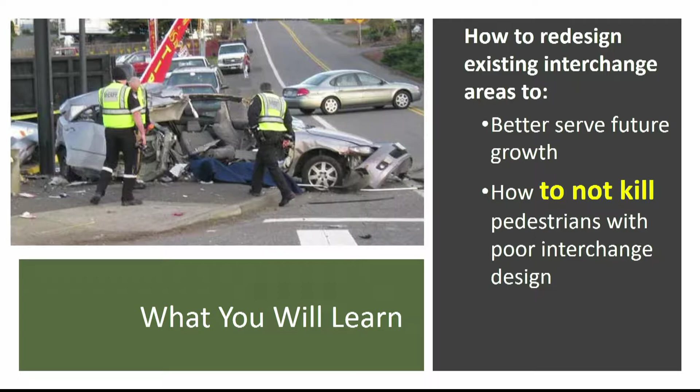As I said before, interchange areas have an extremely important function. They are the gateways to our community. The interchange decision, whether you build one or not, is one of the few times in your careers where you can take land that's $10,000 an acre and turn it into $3 million an acre based on your decision. So you better protect those areas.

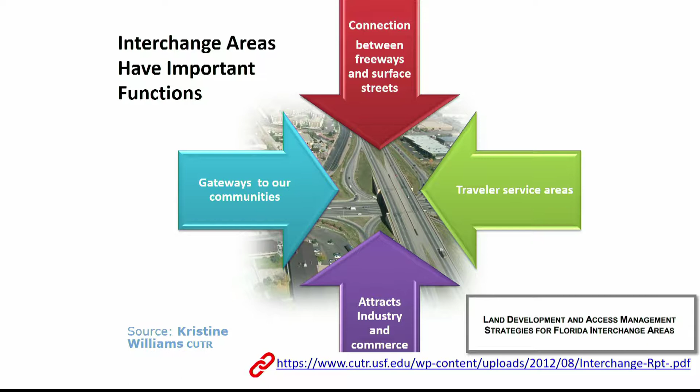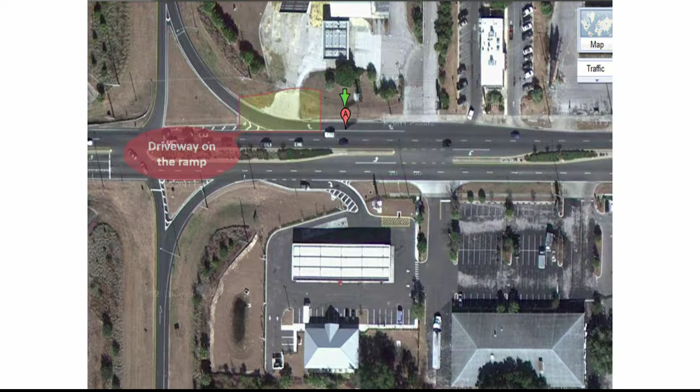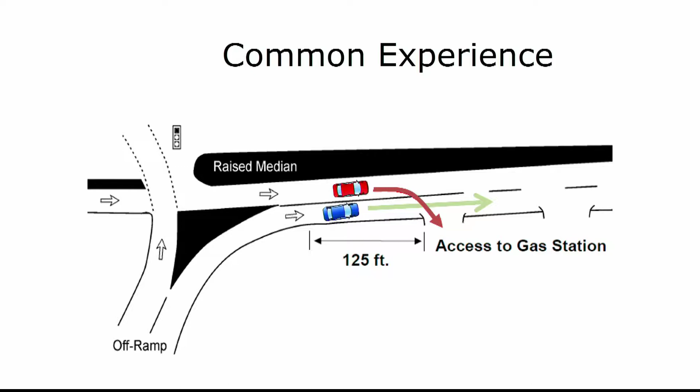Unfortunately, bad examples are really easy to find everywhere, including Florida. Obviously, the red portion is the off-ramp, and just look, this is extremely common. I'm assuming that Florida is not the worst place in the United States. We've got ramps, we've got driveways on ramps. That's what it looks like. And again, not only is it an important area to protect because of the importance of the land use around interchanges, but the confusion of the unfamiliar driver is even more pronounced in interchange areas.

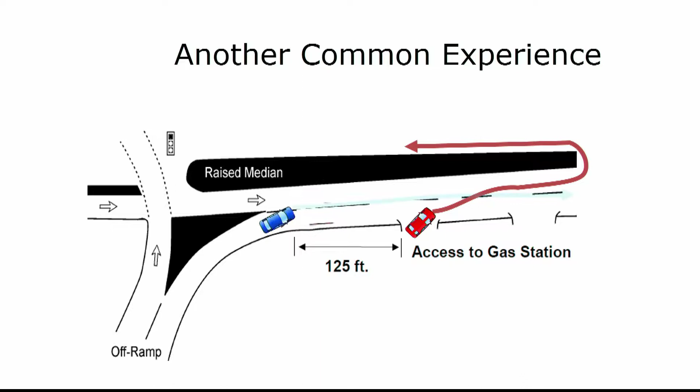I am sure that these situations of very tight weaving by unfamiliar drivers and familiar drivers is familiar to you.

One thing that Terry said that I didn't restate, I would rather you ask questions of me as we go along, just because I really do think that's better for our communication with each other. And the other is I'm much more interested in your questions than I am getting through with these slides. I don't really have that many. I will stay on time, but I really love to hear from you. And so interrupt me, go, hey, you know, because I'm looking here.

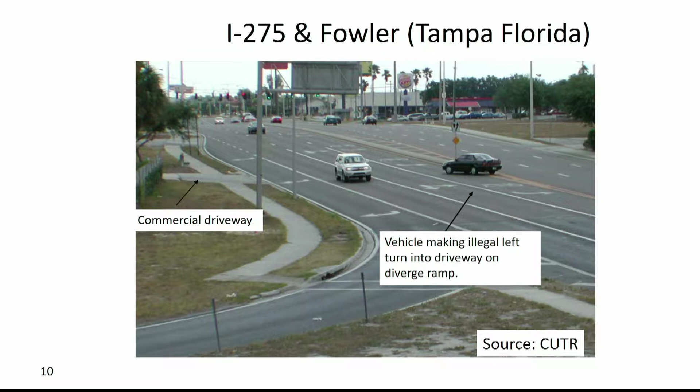But anyway, Kristine, in one of the courses that she's done for me, as I said, it is really easy to see bad things happening at interchanges. And that is one of the reasons, because there are a lot of unfamiliar drivers out there. In addition to that, they are not very bicycle and pedestrian friendly. A lot of times they were never designed for that, but as the land use develops around these virgin interchanges, the entire nature of that area changes.

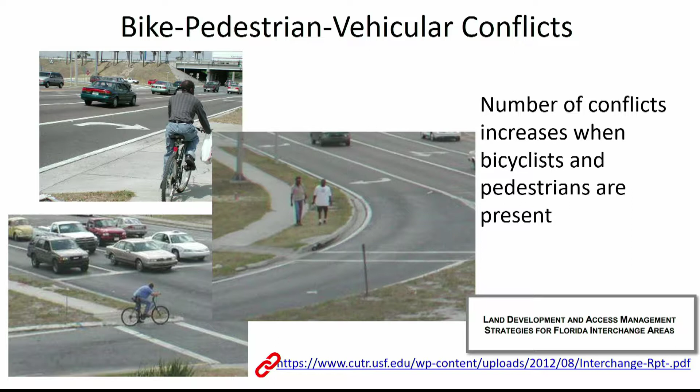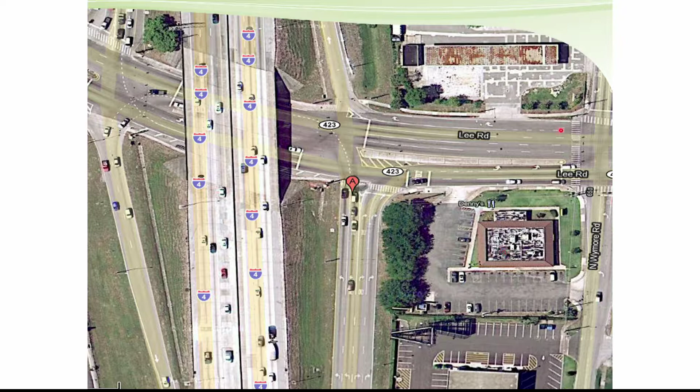To give you a different view of it, there's Interstate 4. Here's the off-ramp. Here's the business, or at least at the time, Denny's, and Wymore Road. Now, in Florida, our access management standards are fairly tough. Driveway spacing is 440 feet in most areas, and directional median openings are quarter mile. Yes? Where does your 440 come from? The 440 actually is a percentage of a mile. It did not come from scientific analysis. When we created our standards, we just used portions.

Well, we knew that signal spacing, half-mile spacing, was supposed to be ideal. And if you come to my presentation on complete streets, you'll find out maybe it's not ideal. But at the time, we thought it was ideal. And land development splitting was done on the mile basis, and then we just kept splitting it down to, mostly, the subdivision of land. And we did have one scientific number, and that was 230 feet for the minimum spacing. And that was based on the ability to stop and maneuver at a certain speed. But the rest of it was pretty off the shelf.

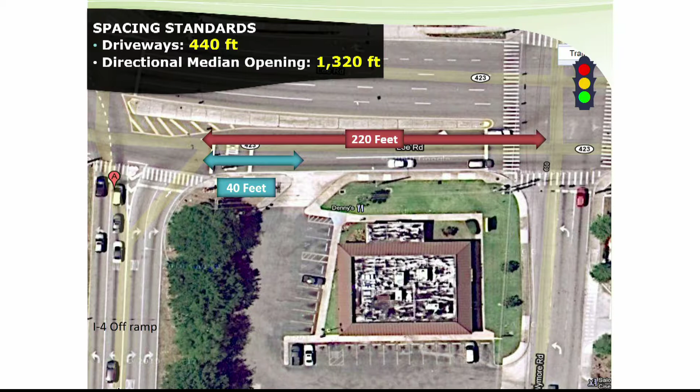back in the 1960s when they designed this and they saw Wymore Road was 220 feet from their off-ramp, they should have made a decision right then and there. You know, what are we going to do with Wymore Road? Or maybe we should have this interchange someplace else.

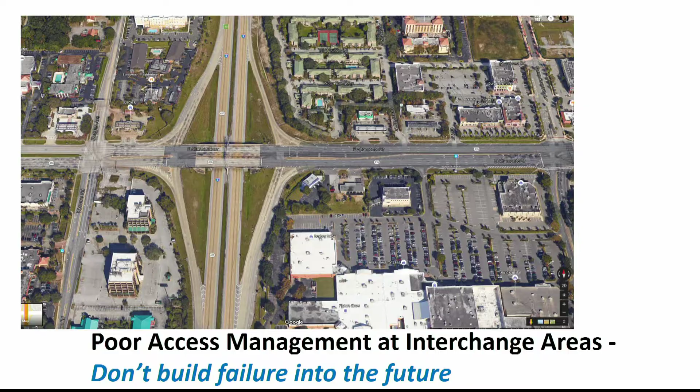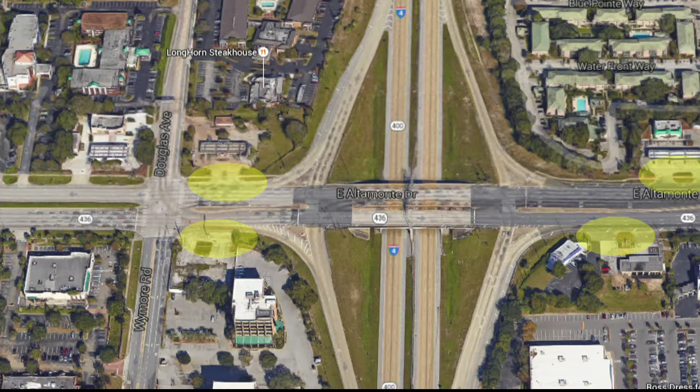A couple interchanges north of Lee Road on Interstate 4 is the most busy interchange in the state of Florida. It's Interstate 4 and State Road 436 in the city of Altamonte Springs. Let me go a little closer here on it. As I said, the busiest interchange in the state. Notice where the driveways are on here. Notice where the traffic signal is. That's another one that's about 300 feet.

Maybe they didn't know it was going to have that much traffic in the 1960s, but they should have had a clue on that. Yeah, State Road 436, when I was a young kid, was called the truck route. How many people have had an experience with that? Oh, we're going to build a truck route so people don't have to go downtown. We're going to take all that traffic off the main road. We're going to put it on the truck route.

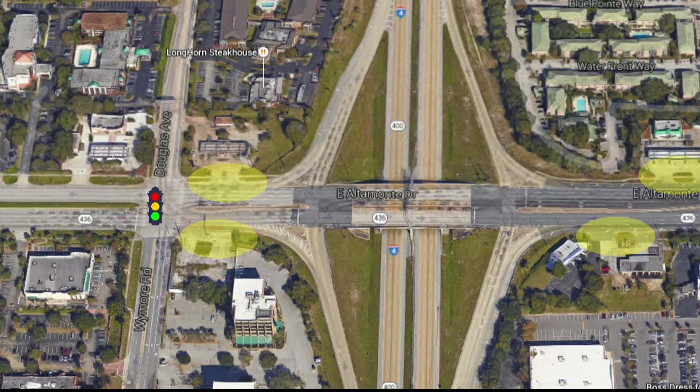Well, anybody who knows anything about State Road 436 now, trucks are 5% of it. What 436 did was open up a heck of a lot of land to develop, and it did. And that's one of the reasons there's so much traffic on it. So,

we do understand at Florida DOT that Interstate 4 through Orlando has outlived its design many, many years ago. So they have something called the ultimate plan, which means I think that they're never going to do anything more. I'm not sure. But this is what the current plan looks like. It's under construction now. This is a little bit more of a plan view. I'm going to show you something I thought was fairly interesting.

Now, they purchased the access rights to this quadrant a long time ago. But for some reason, this time around, they could not afford the access rights to this little gas station. So they're going to continue, even into the ultimate, to have this driveway here. That's okay. The most important thing they did was take that traffic signal and Wymore Road. Remember Wymore Road? It was all the way back at Lee Road, too.

Wymore is a north-south road that runs pretty parallel to I-4 through the Orlando area, or the Winter Park, Altamonte Springs area. They decided they cannot have that signal anymore. Great. So what they did is they didn't close Wymore Road, they just stopped the crossing movement. So that took some good designing to do that.

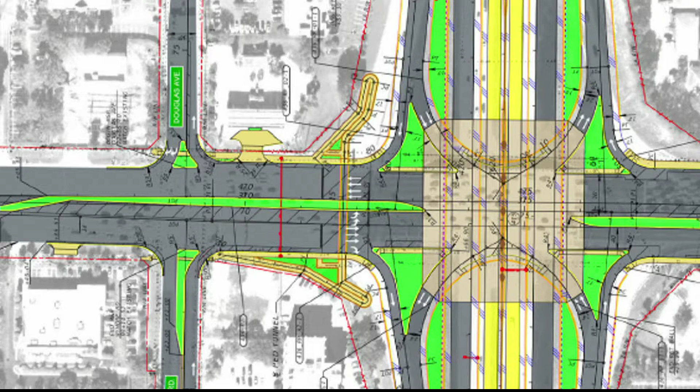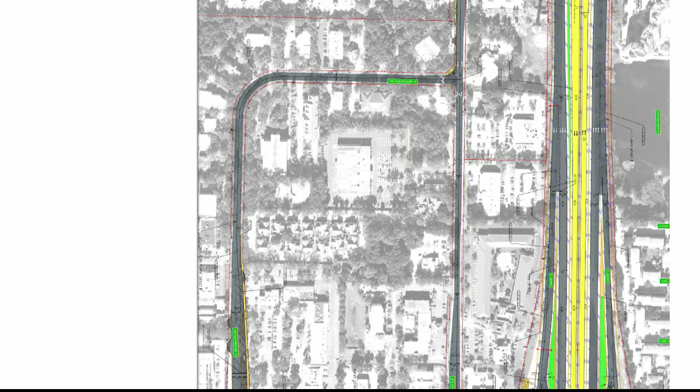Let me also point out that since they did cut Wymore Road off from being through, they, now that I'm retired, I don't say we, built or connected through a number of collector streets to provide that same interconnectivity that existed before, you'll notice. And

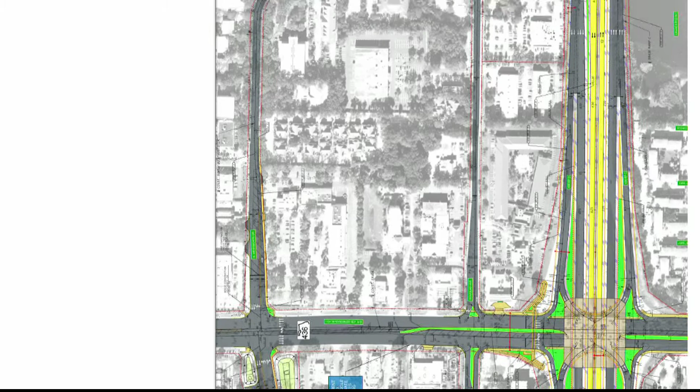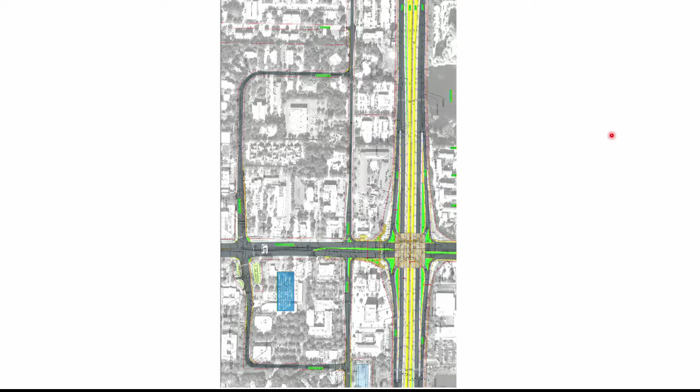what you don't see is that the city of Altamonte Springs, which is, in my opinion, one of the best suburban cities in the state, with their own money built bridges across I-4, knowing that our interstates, though providing great accessibility for people on them, have split up our communities, made it harder for them to be connected, and they built with their own funding bridges across.

Now, one way to make sure when you build interchanges that you protect that area around it is to have what's known as a limited access right-of-way line. This is where you either purchase or you've traded with property owners to have a significant, let's say, over 1,000 feet, even though Federal Highway has a 300 or 400 feet minimum. You got to go way past the minimum.

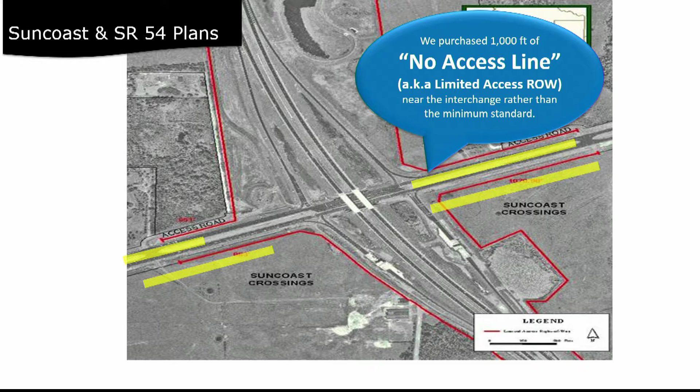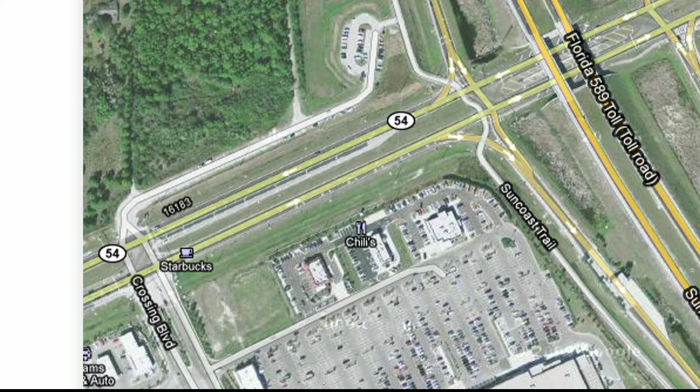We had a major development in the southwest area of Florida that, when the interchange was planned, we were able to get over 1,000 feet of limited access right-of-way at the time. And it has worked pretty well because this is what it looks like today. So you can see there is a nice separation of where the traffic signals are. And

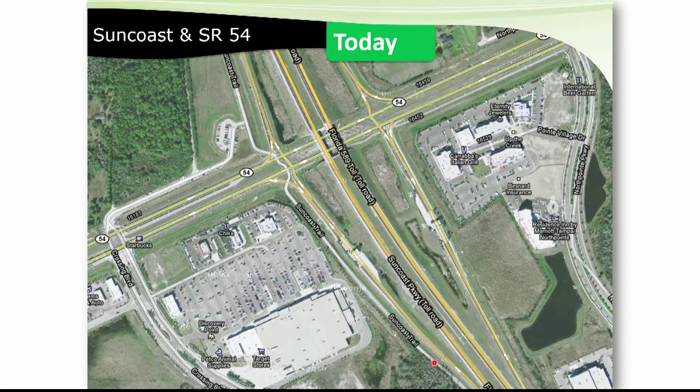even though Florida DOT at the time did not have anything in their design standards on this as clear, I found that Georgia DOT had what I consider a really nice one, where they did mention what they think would be appropriate limited access right-of-way.

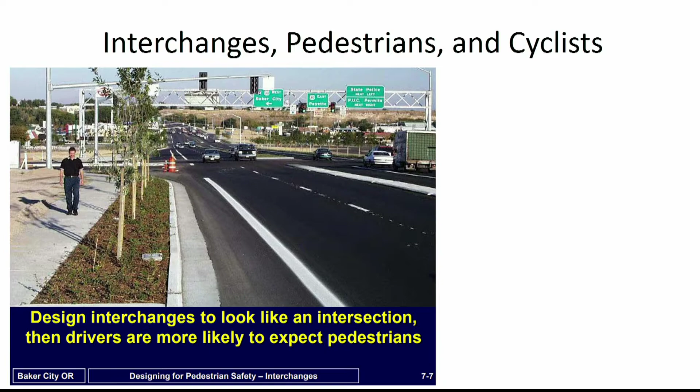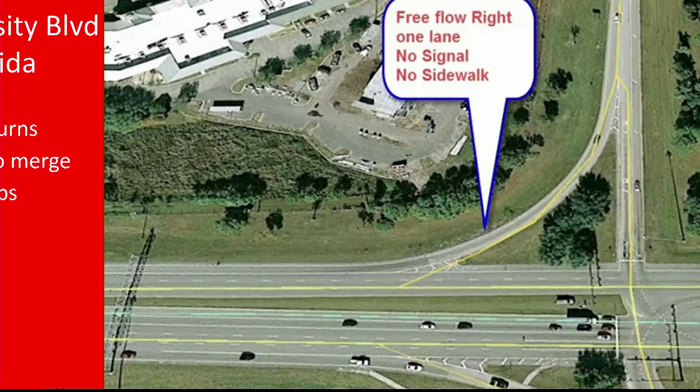Okay, what's the problem with the interchanges? Pedestrians, cyclists. This is Interstate 75 at University Boulevard in Sarasota. Back in the day, our thought was the more grand the swoop, the better the operations.

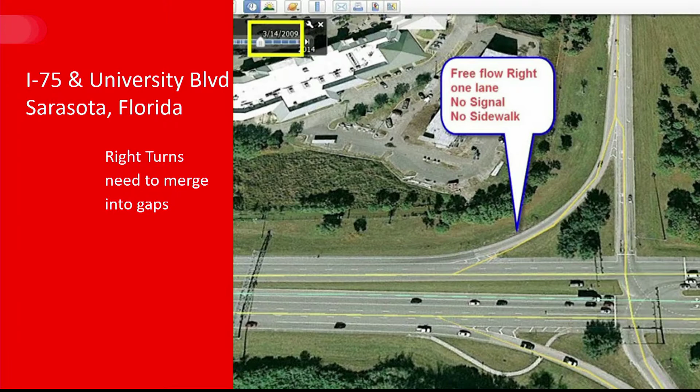What you did was, if you had people go this way, then they would merge with the traffic, people wouldn't slow down, everything would be fast, everything would be efficient. Again, it worked great until there was traffic on it. And so over the years, we have made improvements.

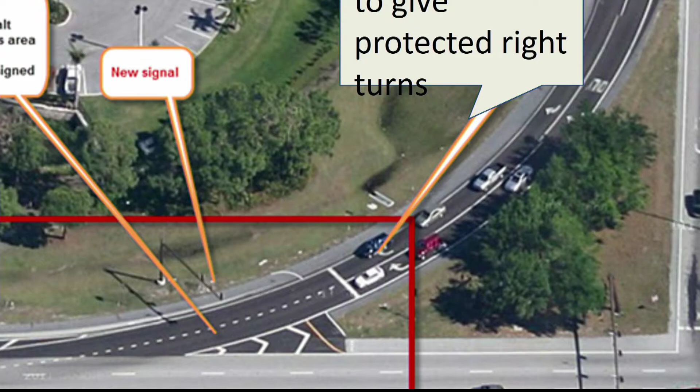You can see that at one point, we did signalize that movement. And so these people now have protected right turns. And a few years after that, not only do we have the protected movement, but they've finally saw fit to put in sidewalks.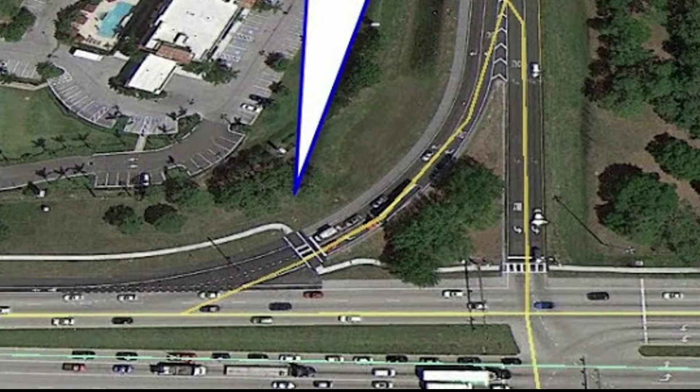So we really need to be thinking about our most vulnerable users at interchanges. One of the reasons is because as you head either onto a freeway or off of a freeway, you may not be thinking about pedestrians. What you're thinking about is getting your car to the place where you want to go as fast as possible, as efficiently as possible.

But the problem is, again, we have encouraged, if it's not a grand sweeping right-hand turn, we're all trained to think that the free-flowing right, keep things moving, make everybody happy. Big problem, especially with cyclists. I'm back here at Lee Road and Interstate 4, near where I grew up. Turns out this is one of the highest crash places for pedestrians and cyclists in the state.

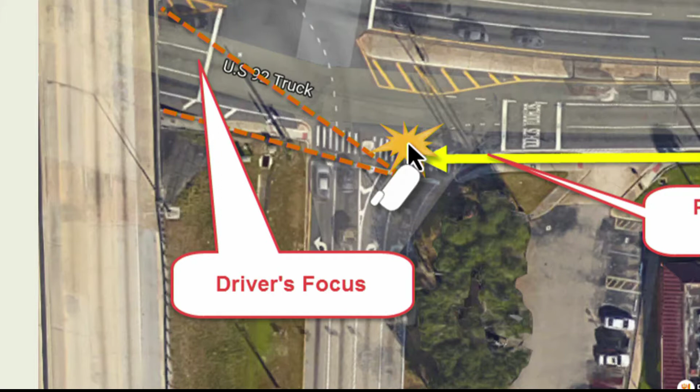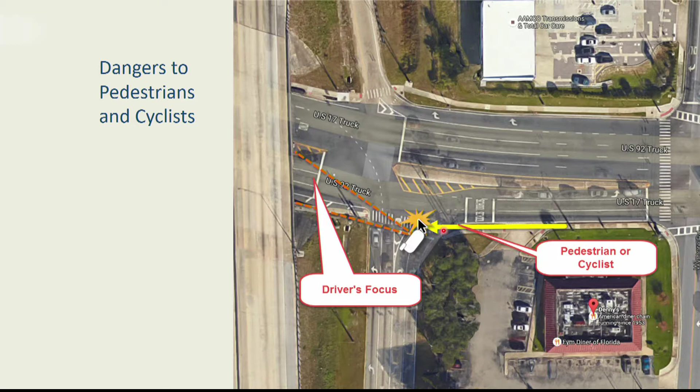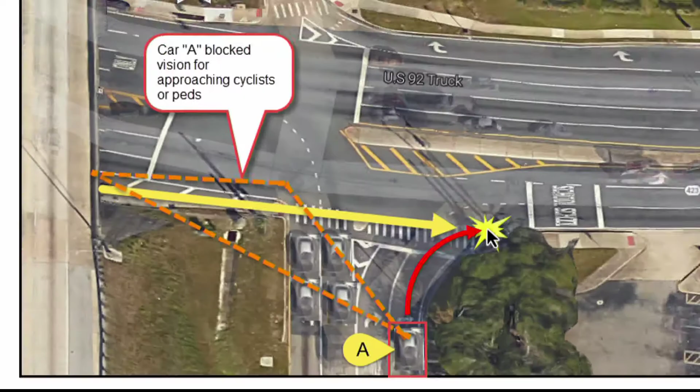And the problem is pretty clear to see. You're coming off the freeway, and you want to turn right, and you're not thinking about the person who's coming at 10 miles an hour on their bicycle in that direction. It is really easy to hit them. And in the same vein, as traffic queues up, you have the problem of cars blocking the visibility of cyclists and pedestrians going across.

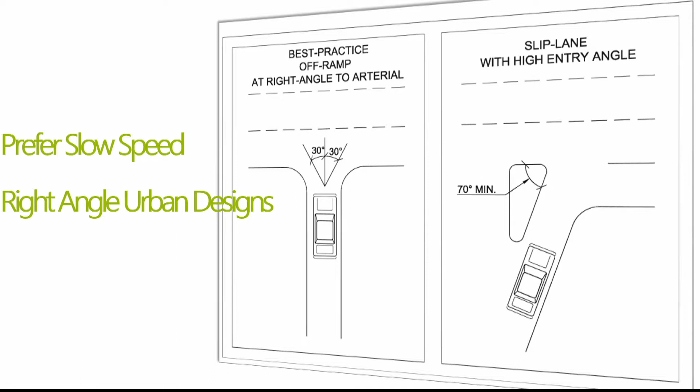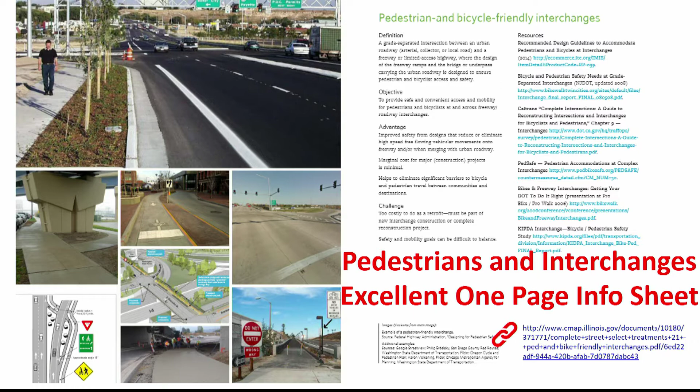So what we're really trying to do is encourage less grand sweeping, free rights, a more 90-degree angle. If you need to know or want to know more, there's great stuff on this about pedestrians at interchanges. I have links in the PDF presentations that you can get if you've downloaded them. And I encourage you, if you're interested in this, that I'm just glossing over the surface of this.

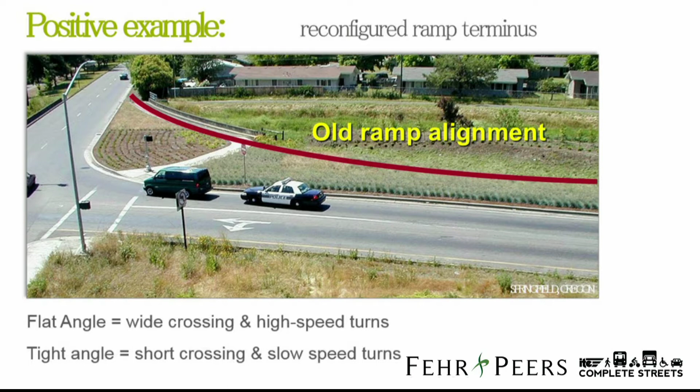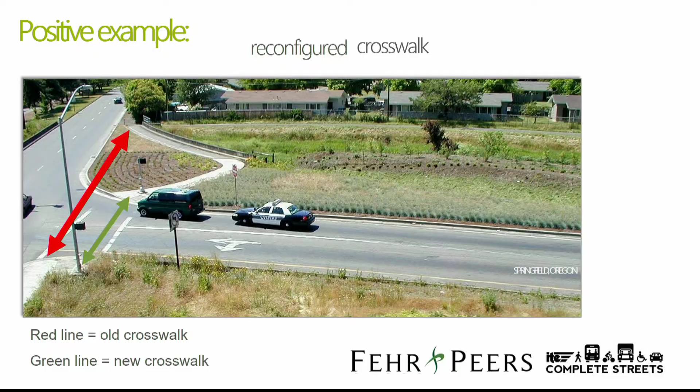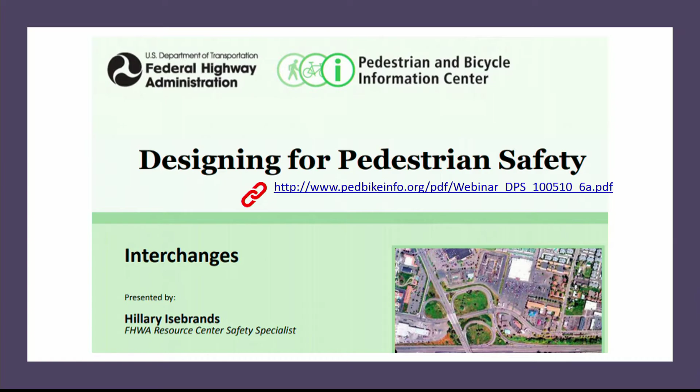But this is one example where they've taken a free right and turned it into something a lot more friendly for the pedestrian on an off-ramp. And you can notice the difference. The pedestrian used to have to cross this much, and now they cross that much. So another link to an excellent publication by Federal Highway. And that is my presentation.

So do we have time for any questions? Probably not. I'm glad you asked questions. We do? Okay.

Yes, sir. So you had kind of a general guideline of 1,000 feet between the ramp and the next access. Do you vary that based on the functional class? And what would it be for like a local street versus a minor to principal arterial? Okay, so the question was, would we vary our desired 1,000 feet of clear area from an on or an off ramp? And the answer is, if it is not a major road, we shouldn't have an interchange there.

On the other hand, as you can tell, we're living in a situation with lots of retrofit, and that's the hard part. I have to say that Florida DOT has done a really good job, spent a lot of money buying up properties near these interchanges when we are making improvements. That's why I was so surprised to see that driveway remaining in the final plans, because we'll just buy up the properties in those areas. It's that important.

Well, most interchange off-ramps, they don't have that. Most interchanges I have looked at, the signal location to the off-ramp location, very rare you will see more than 1,000 feet distance. That's what I'm saying, is that we still are building new interchanges. I know that. The office I worked in, that was the office that approved new interchanges.